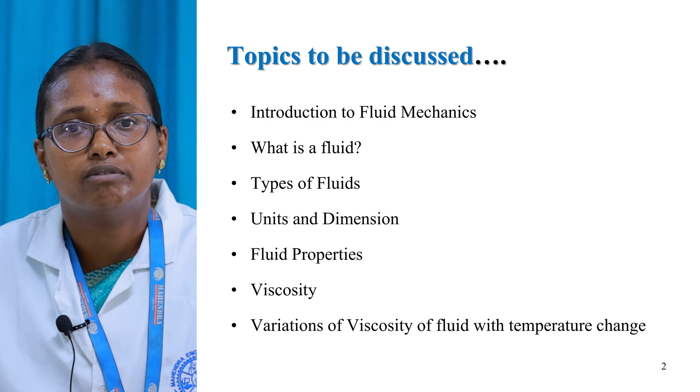So what will be the behavior of that fluid when the body moves? That is what we call mechanics. Mechanics is classified into two things: one is statics and another is dynamics.

Statics is the study of the body at a rest position, and dynamics deals with the body in motion, that is, when we move the object using forces. Mechanics is further classified into many types, such as fluid kinematics and fluid dynamics.

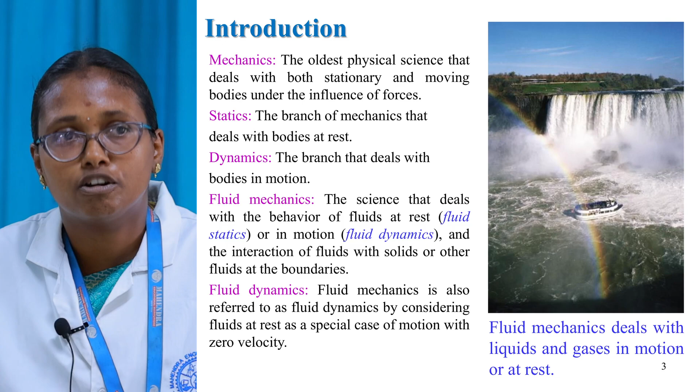Next is what is fluid. Fluid is nothing but a liquid or gas. So why do we call it liquid or gas as fluid? If a substance has the capability to flow, that substance is called a fluid.

A liquid has the capability to flow, as does gas, so we call liquid and gas as fluid. But solid does not have the capability to flow, so it does not come under the category of fluid. Only liquid and gas are called fluid.

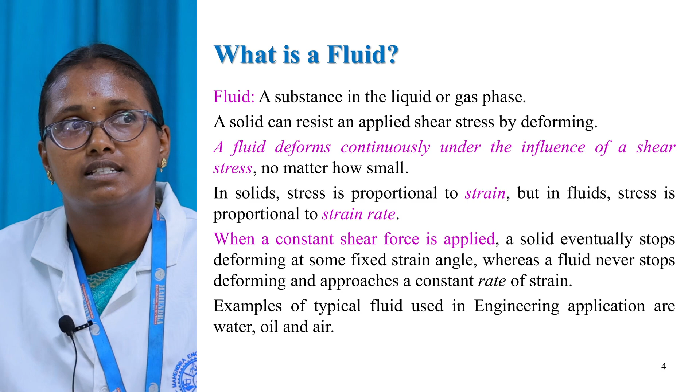Based upon our engineering applications, what is considered fluid? We consider water, oil, and air. These three are considered in engineering applications.

Based on engineering applications, fluid is categorized into ideal fluid and real fluid. How do we classify this as ideal or real? Since viscosity is the main property, fluids are classified based on viscosity into ideal fluid and real fluid.

What does ideal fluid mean? It is nothing but a fluid that does not possess viscosity. That type of fluid is called the ideal fluid.

So ideal fluid means without viscosity there is no fluid. Why do we consider this? For experiments, for explaining a theory or theorem, we consider such a fluid, and we call it the ideal fluid. Generally we call this ideal fluid an imaginary fluid.

Next is real fluid, which possesses viscosity and is also compressible. If a liquid possesses viscosity, that type of fluid is called real fluid.

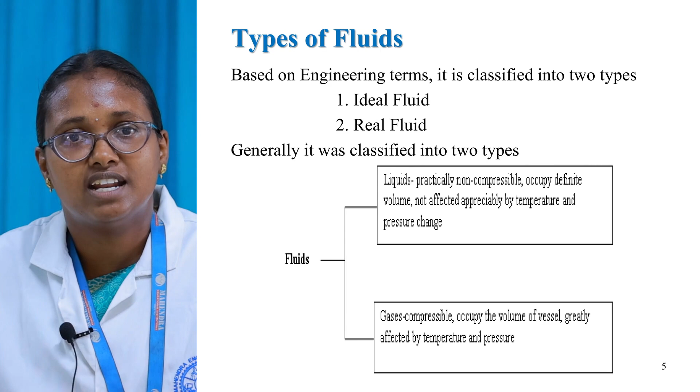If a liquid does not possess viscosity, that type of fluid is called ideal fluid, which is nothing but an imaginary fluid. So generally we classify fluid into two types: one is liquid and the other is gas.

So next, what is the purpose of units and dimension in fluid mechanics? Unit is the one which gives the meaning of a value. For example, what is the viscosity of a liquid? If we say 10, that denotes only a number, it does not denote the viscosity, it does not have any meaning. So for that purpose we use notations called units. What is dimension? Dimension is nothing but mass, length and time. These are the three fundamental dimensions. Without these three we cannot indicate the unit and dimension of a component.

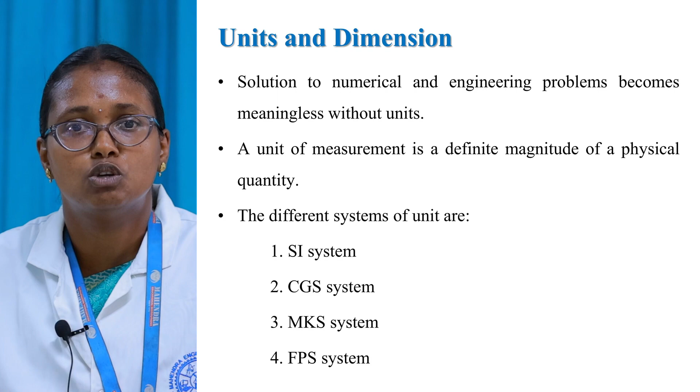The important thing is we need unit and dimension for notifying a component. So these are the fundamental dimensions: length, mass, time, force. By using these only we are denoting the dimensions.

So next, this is the main topic: properties of the fluid. What are the basic properties of a fluid? First one is mass density, second one is specific volume, third one is weight density, and fourth one is specific gravity. Based upon these four properties we indicate the properties of the fluid.

First one is mass density. Mass density is nothing but the ratio of mass by volume. We know that the unit of mass is kilogram and the unit of volume is meter cube, so the unit of mass density is kilogram per meter cube.

The second one is specific volume. It is nothing but the reciprocal of mass density. We know that mass density is equal to mass by volume. If it is the reciprocal of mass density, specific volume is volume by mass, so the unit is meter cube per kilogram.

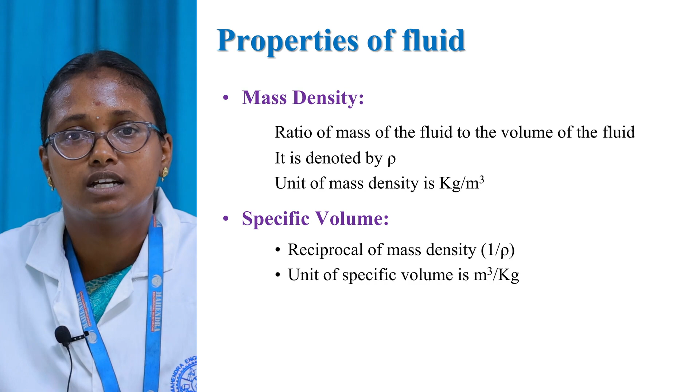Next, the third property is specific weight, also called weight density, that is weight by volume. We know that mass is equal to weight by acceleration - this is a general thing used in physics. So weight is equal to mass into acceleration. Therefore weight density is equal to mass into acceleration due to gravity, divided by volume.

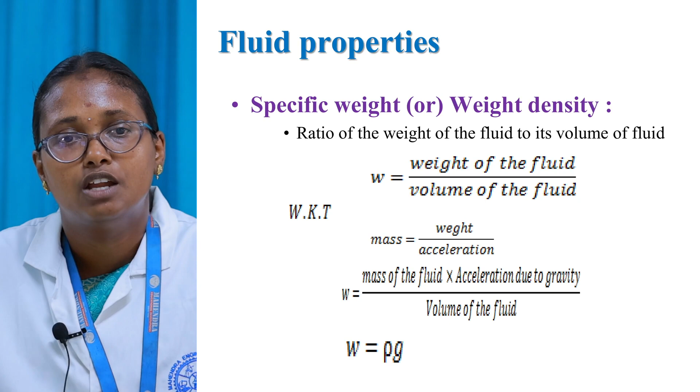We already know that mass by volume is nothing but the mass density, into acceleration due to gravity, which is denoted by g. It is common for all things, a constant value. So weight density is equal to mass density into acceleration due to gravity, that is W equals rho into g. So what is the unit of this? Newton per meter cube. Next property is specific gravity.

Specific gravity is nothing but the ratio of weight density of the given fluid to the weight density of the standard fluid. Here we denote the standard fluid: for liquid it is water, and for gas it is air. What is the given fluid? For specific gravity, whatever fluid they are asking about, we consider that as the given fluid. So it is weight density of the given fluid by weight density of the standard fluid - standard fluid for liquid is water, and standard fluid for gas is air.

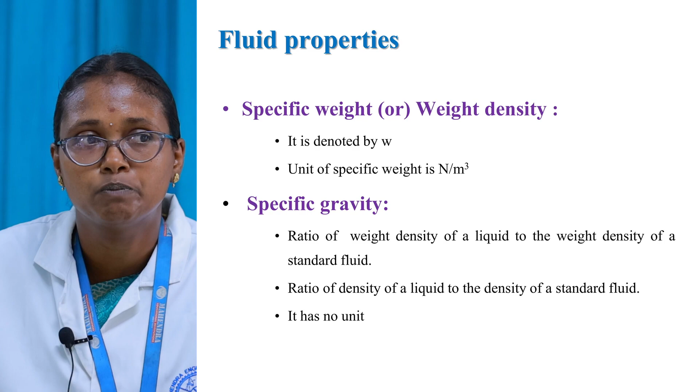Weight density is equal to rho into g, that is the formula for weight density. So it becomes rho into g for the given liquid, divided by rho into g for the standard fluid. The density for the given fluid and the density for the standard fluid are different, but the acceleration due to gravity is a constant value, 9.81, so that gets cancelled. The final definition for specific gravity is density of the given liquid to the density of the standard fluid. So S equals rho by rho - it doesn't have any unit, kilogram per meter cube divided by kilogram per meter cube gets cancelled. So specific gravity does not have any unit.

So next thing is Newton's law. Before entering into the property viscosity, we have to know a law that we call Newton's law of viscosity. It depends upon the shear stress, that is deformation occurs due to shear stress.

So that is what we are calling a fluid. Newton's law of viscosity states that shear stress, tau, is directly proportional to the rate of shear strain or velocity gradient. The rate of shear strain is nothing but du by dy, where du is the change in velocity and dy is the change in distance. So tau is directly proportional to du by dy, the velocity gradient.

So for removing that constant of proportionality, we introduce a component called viscosity. Therefore tau is equal to mu into du by dy. This is the formula for viscosity.

Based upon this law, we categorize fluids into two types: Newtonian fluid and non-Newtonian fluid. Newtonian fluid obeys Newton's law of viscosity, while non-Newtonian fluid does not obey it. So these are the two types of liquid based upon this law.

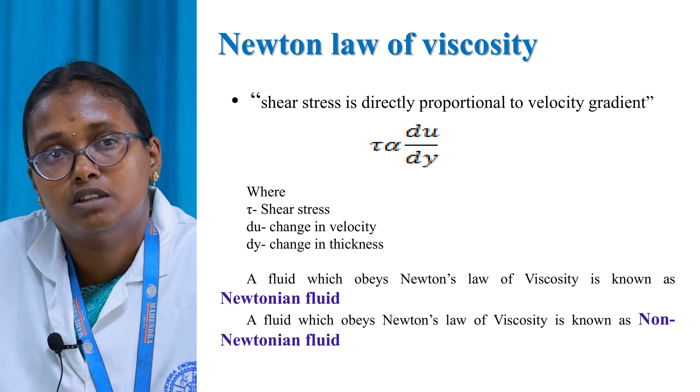The next important property is viscosity, the main property of a fluid. When one layer moves over another layer, molecular interaction happens between them. Due to this molecular interaction, some internal resistance occurs, and that is what we call viscosity. Without viscosity, any liquid cannot be defined as a fluid. So viscosity is the main property.

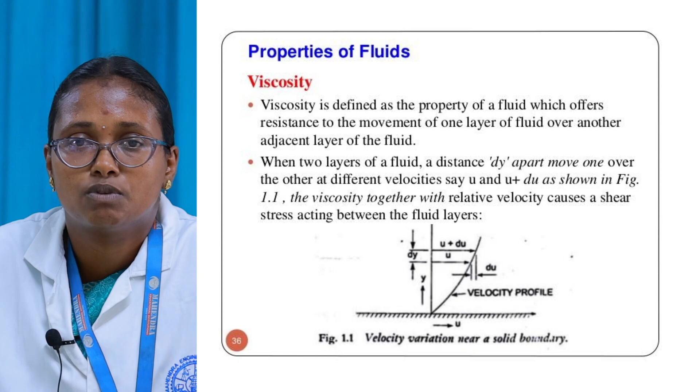Again, when one layer of liquid moves over another layer, molecular interaction happens, and due to this, internal resistance occurs, which we call viscosity. So what is the unit of viscosity? Since tau is equal to mu into du by dy, mu is equal to tau divided by du by dy. This is what we call viscosity, also called dynamic viscosity.

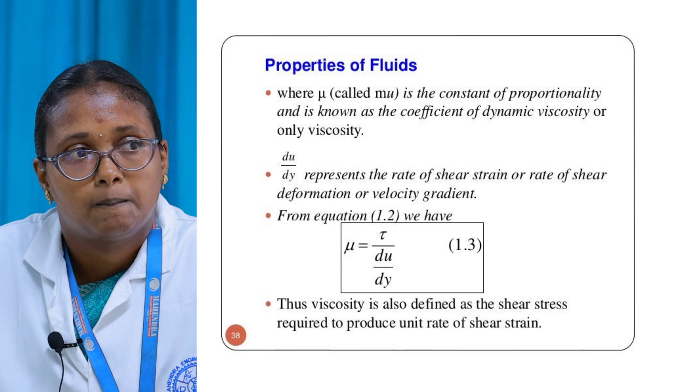Next, we need to know whether a change in temperature causes a change in viscosity. If the temperature changes in the fluid, does viscosity get affected? Yes, the temperature does affect it. When the temperature changes, the viscosity also changes.

For a liquid, for example, when the temperature increases, viscosity decreases. For example, take water in a bowl and heat it, it starts to become vapor. The molecular interaction becomes low, so there is no internal resistance, and therefore viscosity decreases. This is what happens in a liquid.

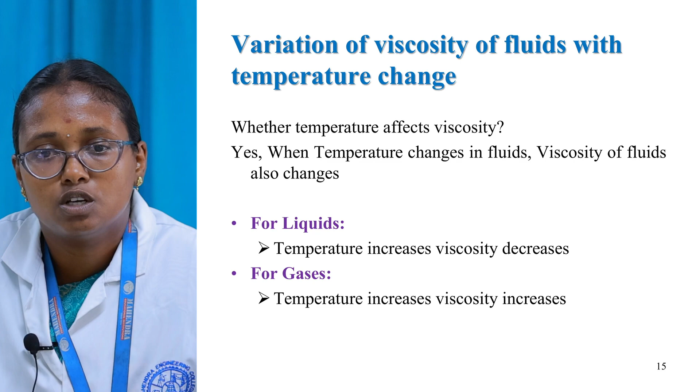For a gas, when the temperature increases, viscosity also increases, since there is no formation of vapor. So does temperature affect viscosity? Definitely, when the temperature changes, viscosity also changes.

We know that weight density is equal to rho into g, but here weight and volume are given, so another formula for weight density is weight by volume. Here the weight is given as 7 Newton and the volume is 1 liter of liquid. Convert this 1 liter into meter cube, knowing that 1 liter is equal to 1 by 1000 meter cube.

By using this, we can find the value of weight density, and from that we can find the specific gravity. We know that specific gravity is equal to the weight density of the given liquid divided by the weight density of the standard liquid. The constant value for density of fluid is 1000 kilogram per meter cube. Using this, we can find specific gravity, and from that we can find the value for density.